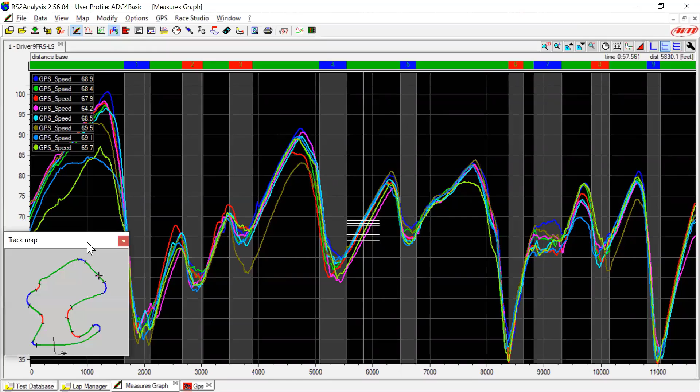It's like Laguna to me. It's Laguna. Very strong hint here in the left corner. One of the nice things about the software is I can open up multiple different windows with different views of the data, and the cursor is synchronized. So my cursor here shows up as a cursor here. So there I am in the middle of turn 5.

Our basic display is distance versus some variable. I start with speed, and this axis here, the x-axis, is distance. The reason you want to use distance is so that the laps stack on top of each other. I can see what's happening in a particular spot. There's a distance mode or a time mode. Now things are all spread out. It's really hard to interpret what's going on. There are a few corner cases where you may want to look at that. Most of the time we're looking at distance.

So when I look at this, ideally, I'm looking at how many laps here. Looking at about 8 laps. Ideally, all these laps would be right on top of each other. In some cases, I see these data traces are very consistent. This is good. I see a lot of inconsistency in some places. Could be traffic, could be the driver trying different things, or it could be the driver needs to work a little bit on providing consistent inputs.

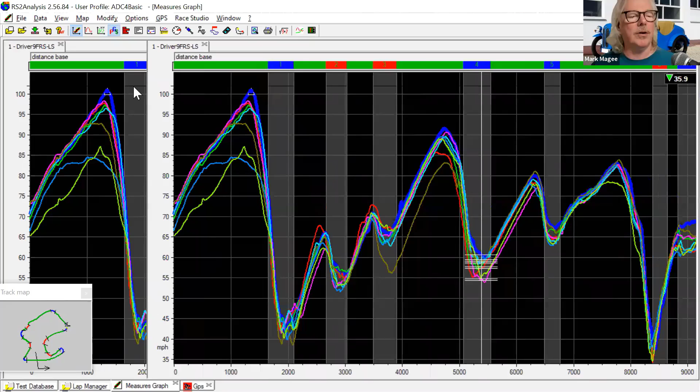My fast lap is the blue lap, and the blue lap is pretty much the best lap everywhere, which is a little bit unusual. There's some cases where there's another lap, a brown lap that's hard to see, that's a little bit better in a couple places. And here the red lap is nice, but the blue lap, let me highlight it here a little bit, the blue lap is pretty representative of a good solid lap from this driver. So we'll narrow down the view. Let me drop out these other laps.

So as I look around the track, this is turn 2 right here, this low spot. This low spot is turn 3, turn 4, turn 5, 6. This is the corkscrew, one of the slowest spots. Right around here is turn 9. This is very challenging for almost every driver. Turn 10 and 11. After a while, you get used to looking at shape, and just from this shape, you can figure out what track you are and what corner you are. In the beginning, it's nice to have this little reference map that can help sort things out.

So what I'm going to start with is I tend to look at the tops first and then the bottoms of this curve. So when I look at the top, get my little marker here, I see one slope here, and I see a different slope here. And I also see another slope here. All right, this third slope, I like that. We'll talk about that a little bit. This second slope, I like that. This first slope, I don't like that.

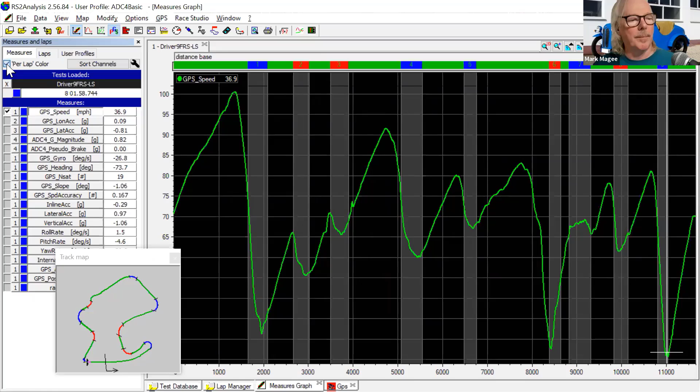So let's, there are plenty of other opportunities in this lap, but let me go to another view before we leave this. So this is longitudinal acceleration.

This line right here is 0 Gs. So that would be my perfect neutral throttle. I'm applying enough throttle so I'm not slowing down, but I'm not speeding up at all. And then going downward is braking, going upward is acceleration.

And if I look at the shape here, what I would prefer to see is this hard initial brake. I get up, I like this slope here. I want a similar kind of slope, but I want my maximum braking there. I don't want my maximum braking later. And then maybe I bleed off a little pressure to prevent lockup, and then trail off braking a little bit like that.

So the shape is almost the opposite of what I see here. Here in turn 5, I kind of got gradually coming up and gradually coming down. I like the gradually coming down. I don't like the gradually coming up. I want that hard braking and then start easing out of the brake.

So there are two different ways to think about it. I like thinking in terms of a brake pressure profile is the term that I use for this shape here. You can also think in terms of this shape. You don't want this two-phase braking.

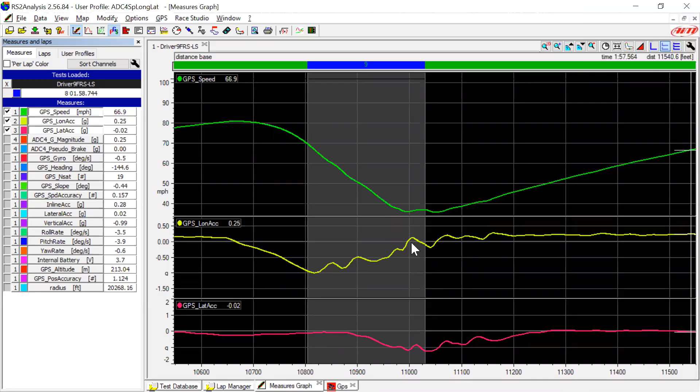And any ideas of what's going on here at the bottom of the W? That's probably getting to the throttle too early and then backing out of it. Exactly. I have another view here where I can see a GPS view of the data, and I have longitudinal acceleration color coded on top of this. So that's where the driver is getting to the throttle. Let's see, right there is my transition to where the driver is getting into the throttle. That's pretty early.

Where they get to the throttle the second time is right there. That looks a little more reasonable. And I can see it here as well. Blue is my braking, light blue. That's my blip where I get a loss of pressure. Then I get some pressure back. And then this yellow here is my acceleration. So I got 1/10 of a G of acceleration, and then that goes away and I'm back to neutral throttle and then accelerate again.

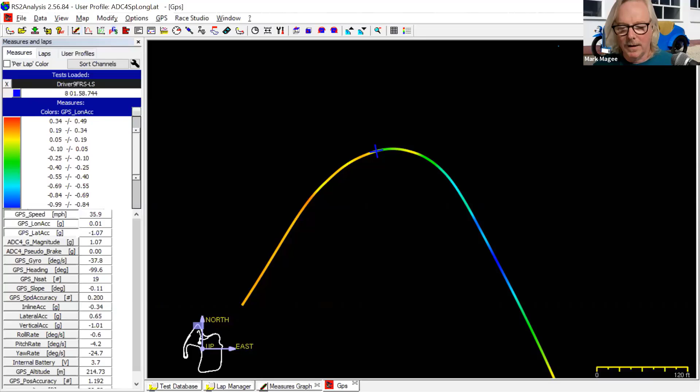So I've got really two things to work on in turn 11. One is to work on that throttle blip, and then just be patient with the acceleration. And there's something kind of interesting going on here in the data. Look at the measures graph. Look at what happens to lateral G's as the driver accelerates. Here's my peak acceleration. Shortly after that, I get a loss in lateral acceleration.

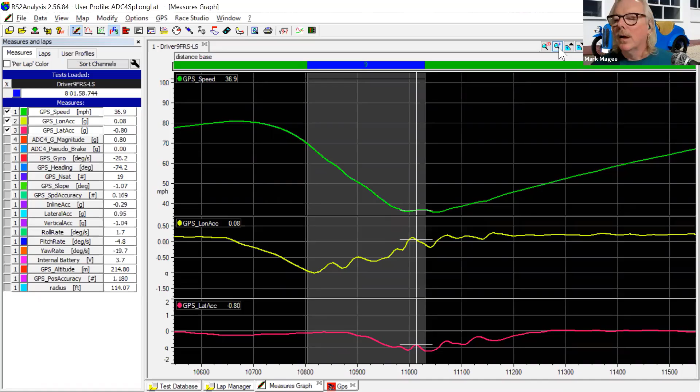So I've got lateral acceleration of over a G, 1.1 G. It's pretty nice. Get to the throttle. Where's the weight go? Weight goes to the back tires. Now I'm down at 0.8 Gs, right? So the driver is feeling, oh, the car's not turning as well, I better get out. The driver may not be going through the thought process of all these things. They just know, oh, it's not doing so well, let me back out and then back in. So we want to smooth out this, and we want to smooth out this. So that's turn 11. Let's zoom back out and let's look at turn 3.

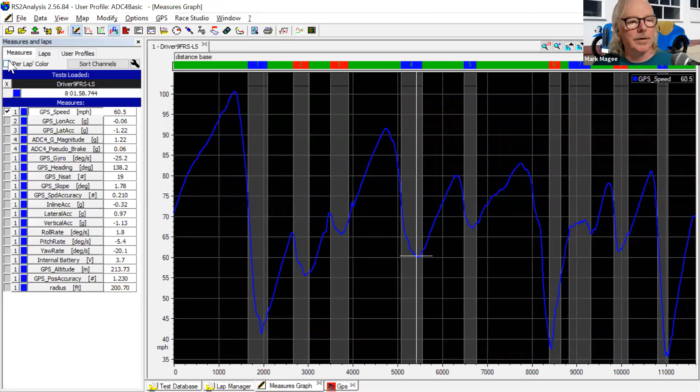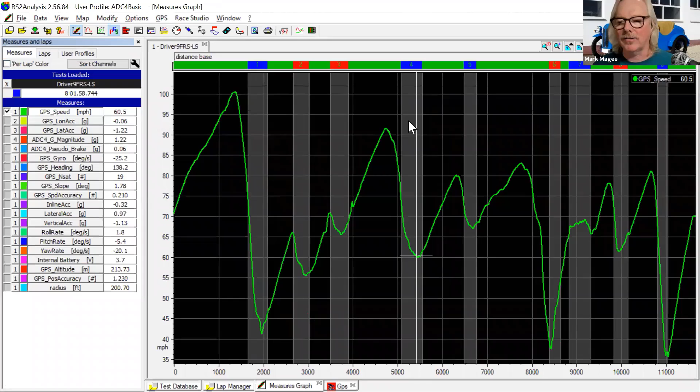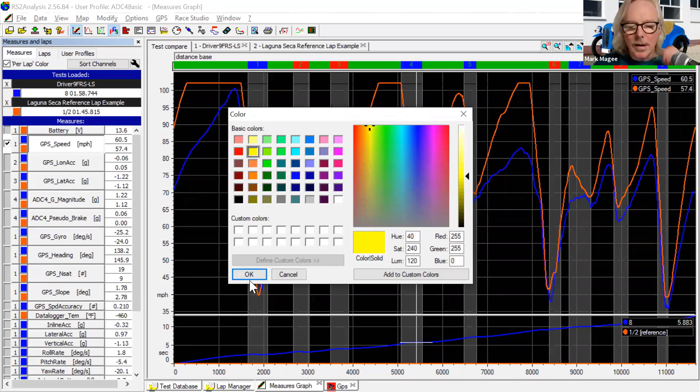And at this point, I'm going to pull up some reference data. So far I haven't used anything except the driver's own data. Occasionally it's interesting to pull up some other driver's data to get a sense for other opportunities for improvement. That blue's a little hard to see. Let me make that a yellow. Okay. So this driver has a little bit more horsepower. You might be able to tell the acceleration is going up much more intensely.

Let's zoom into turn 3 and what's going on here. So the orange lap is an instructor. The instructor just hopped in a student's car, did one lap, came in. So this is not the reference example of a perfect instructor lap. It's just like they hopped in a car and did a lap, so don't expect perfection. One of the things to notice is that the instructor slows down to 52 miles per

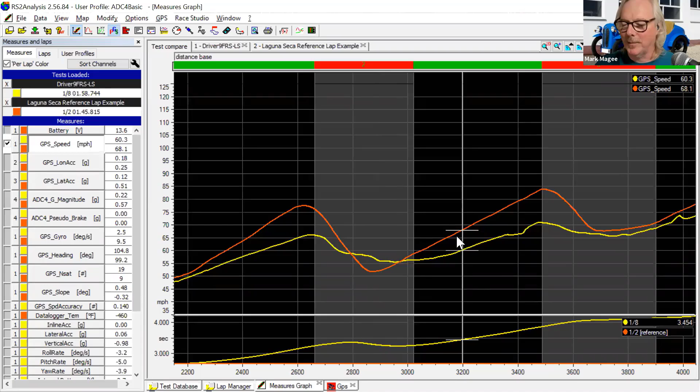hour in turn 3, while the student is going like 56 miles per hour. So the student's going way faster. But is there a problem in what the student's doing? Does the problem sort of jump out? Let me put the cursor out here, see if that gives anybody a hint. Look at where the instructor starts to accelerate, right here. And they accelerate with confidence.

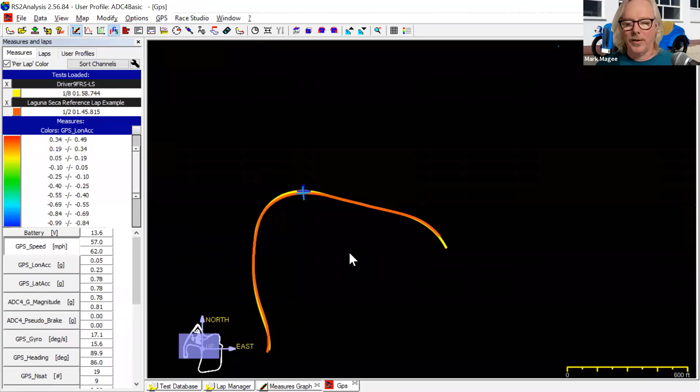Look at where the student starts to accelerate. Somewhere around here is where they really start to commit to throttle. So going back to the track map, they're almost done with the corner before they can accelerate. And if you look here at the GPS data, you kind of get a clue as to what's going on here.

So the yellow line, I'm not going to believe absolute position of GPS data because there's built-in error in the system, but I will believe shapes. So if you look at the shape of this orange line, what I've got is a later apex, and the car is straightening out, the driver's unwinding. In the yellow line, my student line, it's more of a constant radius. It's an early apex line, and the driver is not done turning the car until much later.

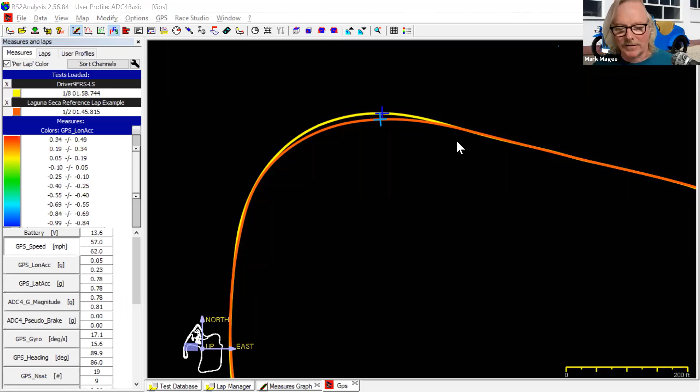There's a much tighter radius here with the orange line. A lot of turning gets done. And then the driver's unwinding. So this shows the classic advantages and disadvantages of early apexes. Early apexes allow you to enter a corner very fast, and then you have problems at the exit. In this case, the driver manages those problems by being really slow with the throttle, right? But that, especially with a momentum car, being late to the throttle hurts all the way down to turn 4.

So it's not just a performance issue, it's a safety issue. If the driver has a lapse of judgment, there's something on the track, whatever, having a super early apex like this is just riskier. So that would be my third piece, is to bring that in.

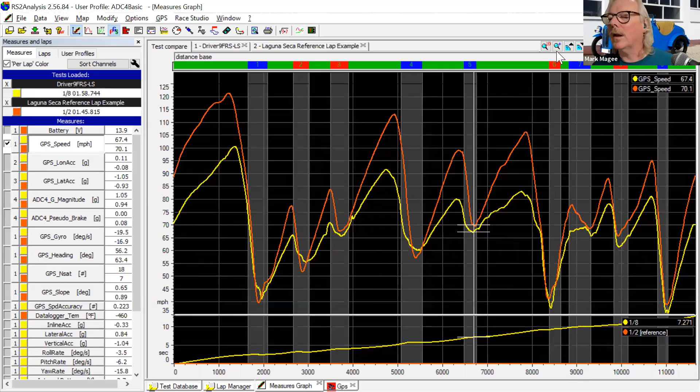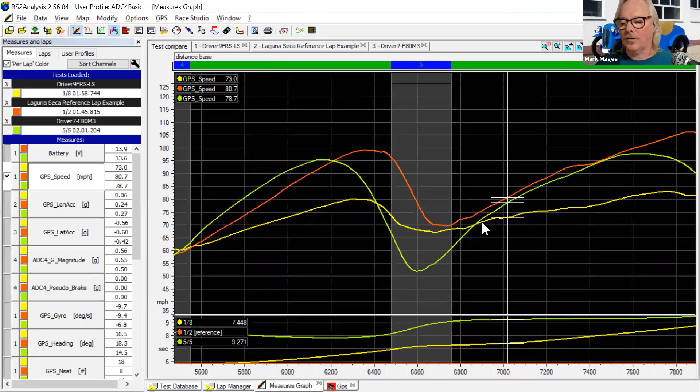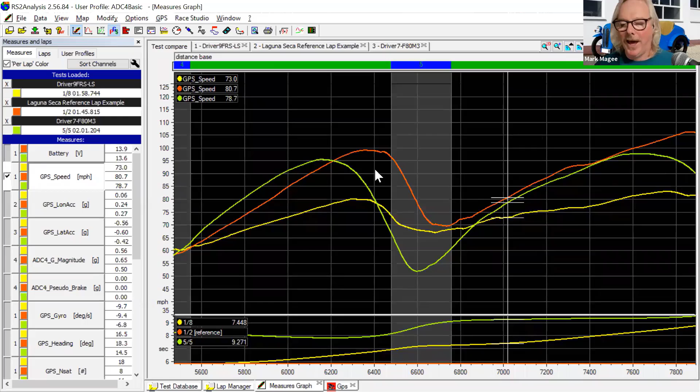The last thing I want to point out with this driver, if I go back to a full lap, right here is turn 6. Let me zoom into turn 6 a little bit. And I actually have another driver I can pull up. So this is a different student. Let me zoom out just a skosh. So this is turn 6. The student we're talking about is yellow. The instructor is orange. This other student is in green. And keep in mind that the instructor driving somebody else's car did one lap. They can most certainly do faster than this.

Look how close the student's minimum speed is. That student is carrying 67 miles per hour through turn 6, right? And the instructor is carrying 69, almost 70. So very close in speed. So when I look at this, there may be a little room for improvement, but this student is doing a great job. And what they're doing is early brake, a moderate brake, early throttle. And this is a fast momentum corner. That's exactly what I want to see. You've got to focus on getting that good exit.

You could see, if that driver had a lot more horsepower, they'd get a beautiful exit coming out of that corner. As it is, that 4-cylinder is working as hard as it can to give a decent exit. So this is something the driver's doing great. I'd like to see the driver continue to do this. And then maybe Sunday afternoon, we can talk about whether there's a way to go a little faster through turn 6. But for now, it looks great.

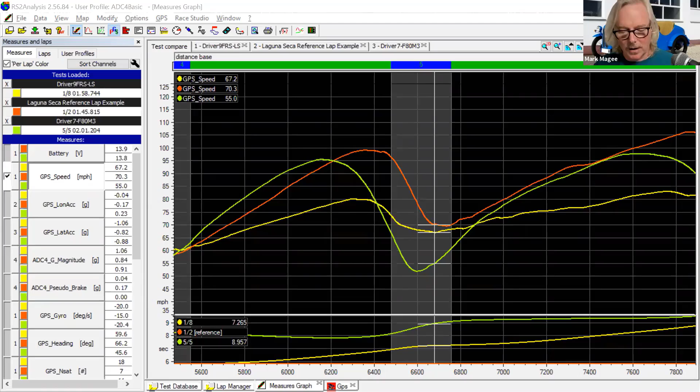So if I were to go back to my goals that I'm going to hand to this driver, I'm going to say turn 5, get to full pressure very quickly, relax that pressure if the brake was too early. It's definitely too early. On later laps, adjust the brake point. So we want that transition to full pressure. We want to build in that muscle memory, and then we can work on adjusting the braking point to something more appropriate.

Turn 11, I really got a couple of goals: steady brake pressure during the blip to avoid these problems here. And then I want to see patience with the throttle. And turn 3, I need to see a much later apex. That'll be a safer line. And we can worry about turn 3 after we fix that bit of it.

So I talked about 3 goals. This is really a pretty heavily loaded set of 3, because I've got sub bullets and so on. With this particular driver, I would go ahead with this set of goals and just see how it goes. Are 2 goals more appropriate? I think this is a good starting point for this particular driver.